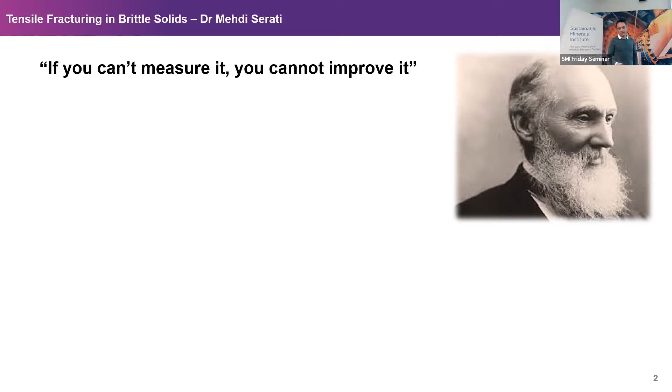But over the years, we have developed advanced testing methods both in the lab and in the field, and also advanced numerical simulation and probabilistic models. So the judgment we use in our design is more informed based on all this new technology becoming available to us. So measurement is the key.

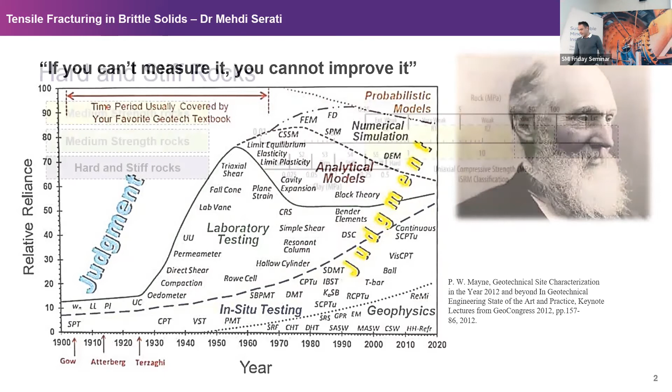And when it comes to measuring properties of rock, especially hard and stiff rock, measurement of tensile strength is a very controversial topic. But why is that? What is so unique about tensile strength measurements of rock, and why does rock behave so differently, in my opinion, when hard and stiff rocks are subjected to either direct or indirect tensile stresses? In order to answer the question, let's start with some basics.

According to the International Society of Rock Mechanics, referring to the chart on the upper right corner of the screen, the key property that distinguishes a hard rock from weak soil is basically an unconfined compressive strength of 100 MPa and above - that's the pink zone on the far right end of the spectrum. Between 25 to 100 MPa, if the unconfined compressive strength, or UCS, is within this range, it's classified as a medium strength rock. And anything below, generally speaking, is not classified in many literature as rock.

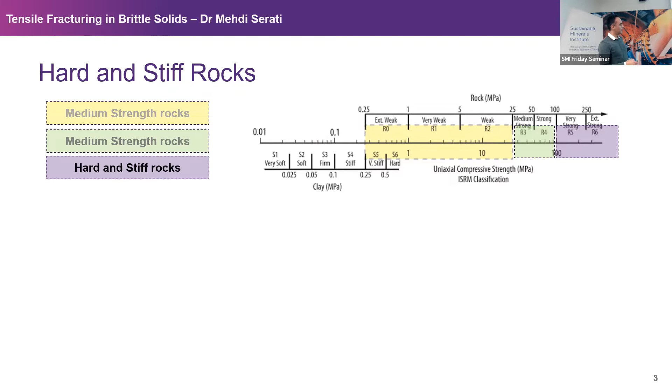Basically, we have a shared zone between extremely weak, highly fractured rock and very stiff soil. Hard and stiff rocks, like some listed on this table, also have a very low tensile strength relative to the compressive strength.

They have a high stiffness or Young's modulus, which means a high brittleness index, defined as the ratio of compressive to tensile strength. In some cases this could reach up to 50, the ratio of UCS to sigma t. And there's the energy you need to apply to deform the rock.

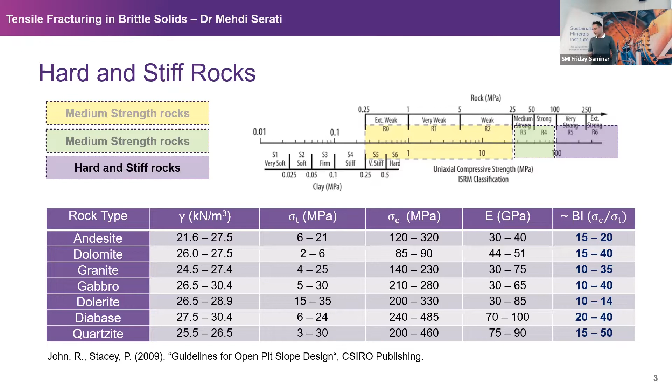If you put all these together, and especially if the rock is subject to loading, it means that when tensile rupture happens, it's going to be sudden, quick, noisy, catastrophic, and very spontaneous. And I've got a few examples for you in the coming slide.

All right, so this was a typical example of a type of explosion, like hard rock explosion, that you might have seen in the lab.

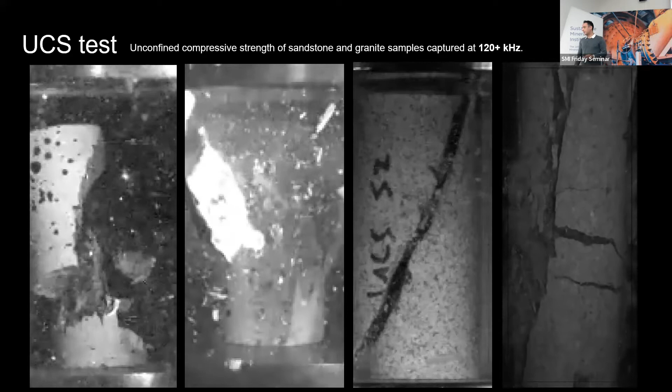All these photos that you see on the screen are at zero confinement, and they are captured at around 100,000 to 200,000 frames per second. With sandstone, the crack forms through an oblique shear plane. But when it comes to hard and brittle, stiff rock like the one on the clip to the left, it's very sudden, more like an explosion. It's totally different from the behavior of a relatively less stiff and less strong sandstone rock.

This is another example of rock burst or spalling, a type of hard rock explosion. This is not a blasting exercise. It's mainly a deep tunnel in hard rock due to higher stresses. You can install a seismic monitoring system, and the operator recognizes that something is happening and an event is occurring. This is what's commonly referred to as rock burst and spalling in the field.

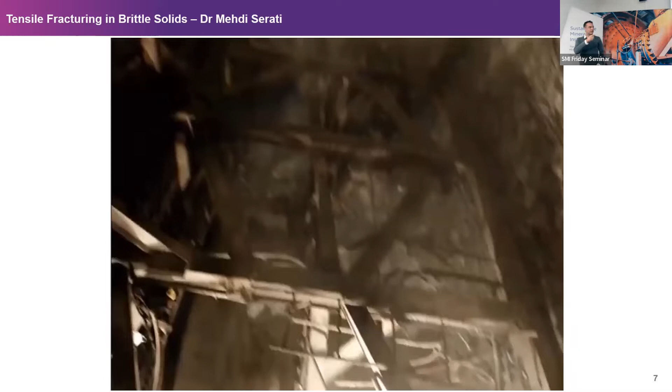This is another example of this type of dynamic behavior. A big block of rock due to spalling was separated from the edge of the excavation and hit the support system.

This one is interesting. It happens so quickly, as you can see - again, rock burst and spalling - that the poor operator has no chance to escape the excavation area.

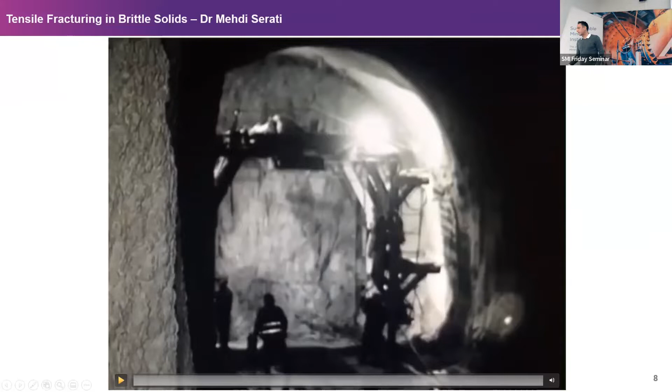What you see on the screen is our attempt to measure or understand spalling at the lab scale. So what we did: we have a block of rock, a cubic shape, in this case with different sizes, from 100 to 200 millimeters. There is a hole at the center, which represents the tunnel.

As you can see, when you apply loading under no confinement - a UCS, one principal stress in the vertical direction - the beauty is here at the roof of the tunnel, of the borehole. When you apply load, you get this tensile crack, the initiation and propagation of the tensile crack.

Then at the side wall, under this stress condition, you have the major tangential stress in compression. We see the type of explosion and the fragments separated from the sidewall flying into the excavated area. It's very similar to the type of spalling or rock burst that we see in underground excavation.

These were recorded - because it happens so quickly, we need to use a high-speed camera. So we use an ultra high-speed camera that can run up to 1 million frames per second. This is what you see: the frequency of the camera.

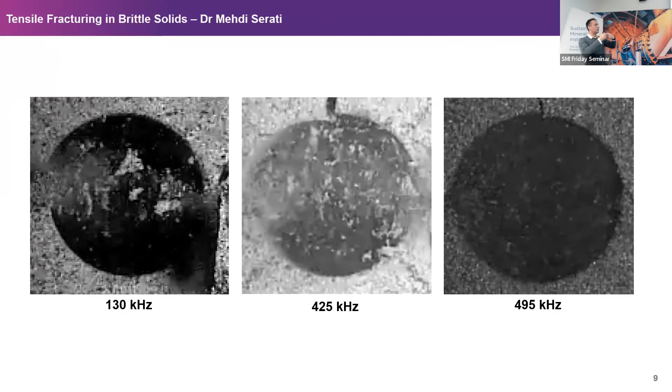What we did, under different hole diameters and different biaxial loading ratios, we tried to understand the spalling speed. You have the size of the fragment that you can collect after the test, and using the calibrated high-speed camera, you can measure the speed, which gives you the kinetic energy. So when spalling happens, as a function of hole diameter and the ratio, what would be the energy release during spalling?

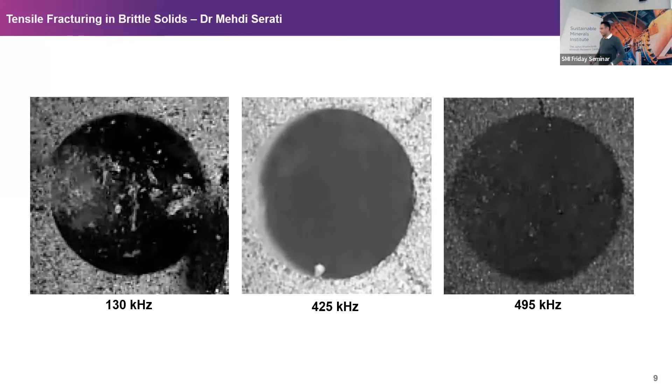Initiation and propagation of unwanted tensile cracks is deemed to be responsible for spalling and rock burst, but that's not all. There are many other applications in rock mechanics where tensile fracturing in brittle solids is also a very important and dominant rupture mechanism.

For instance, in hydraulic fracturing, this is an obvious case. We know, according to Kirsch's equation, in a deep mine, when the ratio of horizontal to vertical stress is less than 30%, or one-third, then we get a tensile zone at the roof. This is very similar to the example I showed you in the previous slide. More recently, Kaiser and colleagues have also suggested that spalling and brittle fracture in rock could also happen in weaker rock, like a slightly cemented sandstone or clay shales.

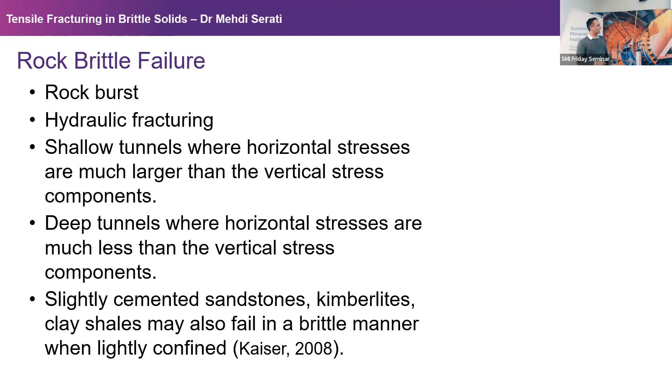The image on the screen gives you an idea of how extreme a spalling incident could be. Imagine working in this environment, with slabs or flakes that could be very large, up to maybe 1 meter, with sharp edges. The speed varies depending on the stress condition, but in our experiment could go

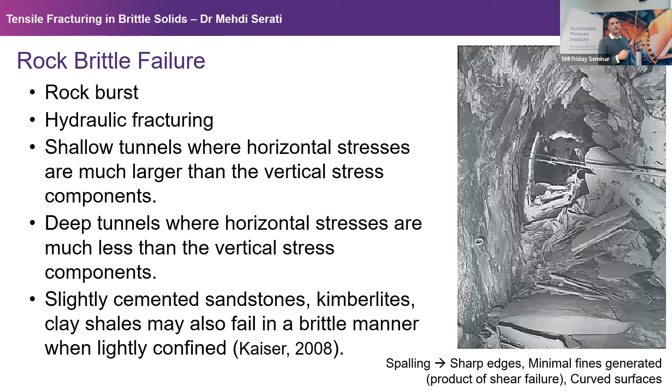all the way to 100 meters per second. With sharp edges, usually there is no fine or dust generated, because fine or dust are mainly attributed to shear fracture. This is totally different. It's a safety hazard, and if it's not controlled, it's going to be catastrophic and fatal.

In a nutshell, tensile fracture in hard and brittle rock, if not understood properly, could be spontaneous and catastrophic, could be violent and fatal, and most of the time it leads to a large fragment with huge energy release.

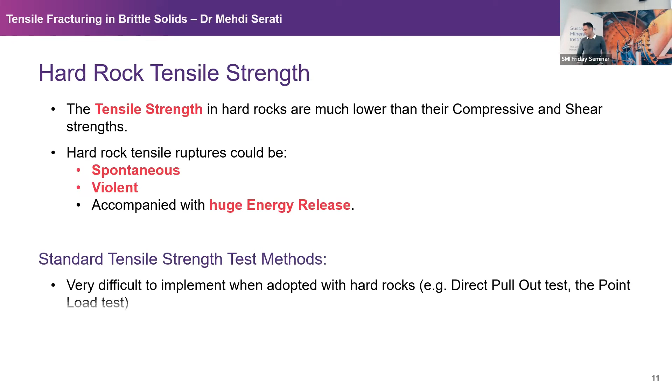So the question is, we need to find ways to measure tensile strength with ease and with reliable methods. You might argue that we do have standard recommendations to do that, right? But the problem is many of these standard recommendations were developed when mines were not this deep, the depth that we are now excavating minerals.

And as you go deep, you are confronting harder geological formations. Most of these old testing methods, maybe 50, 60 years old, to measure tensile strength of rock are very good when you are dealing with medium strength rock. But when you apply them to hard rock, it is very difficult to follow the standard requirements entirely.

I'll give you some examples in the coming slide. Most of the time, when these methods are adopted with hard and stiff rock, they tend to overestimate the tensile strength. And this is unfortunately a point that is largely ignored.

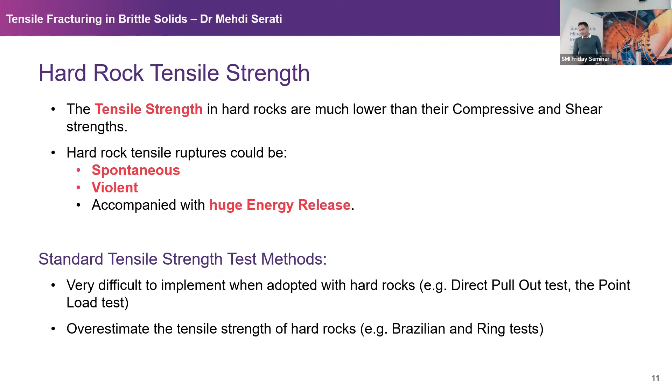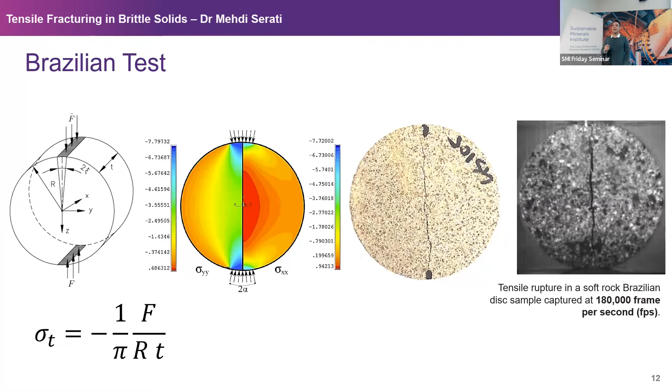In a recent project, we tried to understand what happens if you get different fracture patterns, different types of tensile fracture mode, and how that impacts our estimation of the tensile strength.

So we prepared, over a 4 or 5 year project, around 450, I guess near 500, Brazilian samples from a wide range of different materials. Here in this chart you see the distribution of the Brazilian tensile strengths. We tested ceramic with up to around 30 MPa of tensile strength, all the way to asphalt, which has only maybe less than 2 MPa of tensile strength.

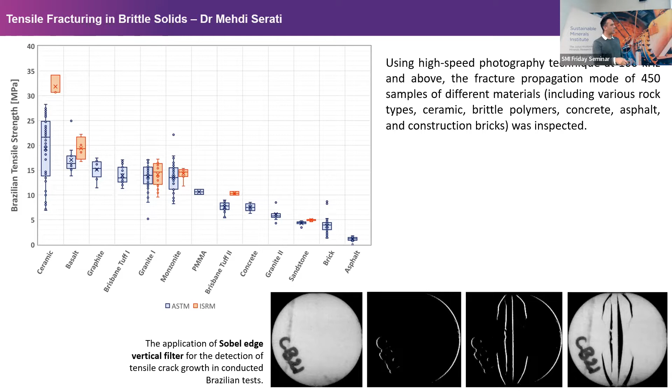In some cases, when we look at the high-speed recording, we needed to use specific filters and techniques to be able to record the initiation and propagation of the crack. And I think here is the fun and interesting part.

When you test the Brazilian sample of a material, depending on its brittleness index, you don't get just one fracture pattern - you get 8 different types of fracture pattern.

Type 1 and 2 are very similar, and this is what you expect from a standard Brazilian test - you get a single tensile crack that splits the sample into 2 halves, initiating from the center. Type 3 is when you have some moderate size shear fracture or conical shaped fracture at the contact area once the tensile crack is fully propagated.

Type 4, which is very violent, is when you have multiple cracking. Then we have type 5 and 6, when the crack doesn't start from the center, but rather starts in a straight, concave, or convex shape from one of the two contact areas.

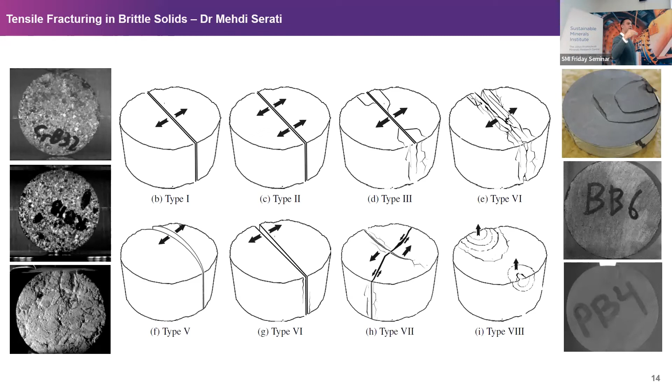The same applies for type 4. In some cases, type 4 is multiple cracking. So if you test your ceramic sample and don't get a single crack but still use the Brazilian equation, you should expect up to 50% overestimation of the tensile strength. And that's huge, that's huge.

So if you are using the Brazilian test to measure tensile strength of hard and stiff rock, and getting a single crack is very difficult, you need to treat it with caution. I'm not trying to say it's invalid - we did it in one of our journal papers and it was rejected because reviewers said you need to be careful, people are doing this. So you need to treat it with extreme caution.

Now what could be responsible? For instance, we are getting 8 different fracture patterns. What's causing it? Is it because of the boundary condition? Is it because of, for instance, the grain size? What could be responsible for those types of fracture patterns?

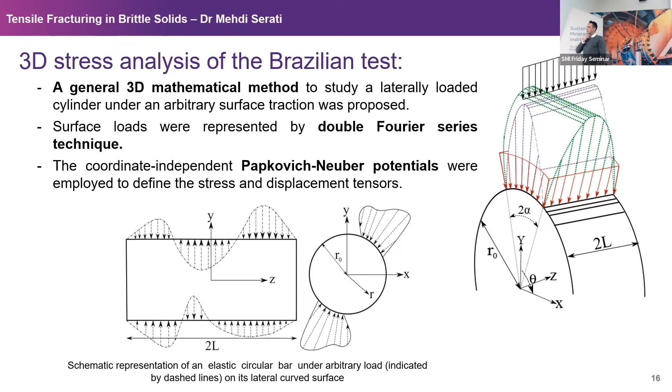In order to understand that, we developed a three-dimensional mathematical framework. We used a double Fourier series technique when we implemented the Papkovich-Neuber coordinate independent potential. My apologies for this slide - I have no intention to go through all these equations, but the reason I put it up is just to demonstrate the approach.

This 3D framework, as long as we can introduce the boundary condition at contact using a double Fourier series, can be used to generate and get an idea about the induced stress inside the solid body. For instance, here we have the double Fourier series representation of a typical case where the load on contact is distributed uniformly, not only on the periphery but also along the thickness, or different types of loading conditions.

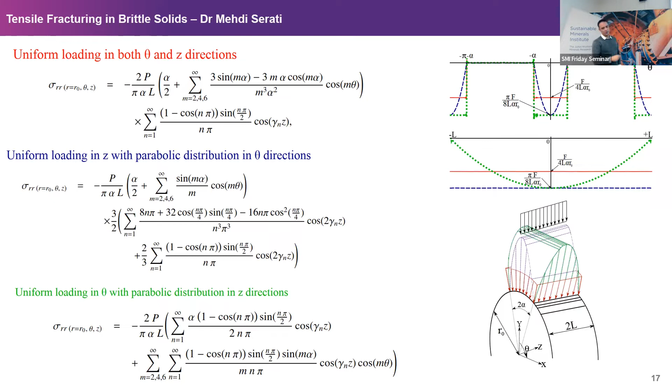And I think this is the interesting part. In a standard Brazilian test, it is assumed the contact angle is small, less than 15 degrees. The load is distributed evenly on the contact arc length and also along the thickness. If you use that testing or boundary condition and put it inside the three-dimensional framework, this red solid line is the type of stress distribution you get when moving from A to B. So this is a tensile positive regime.

This means that the maximum induced stress, normalized based on the Brazilian equation, suggests that the maximum tensile stress, sigma XX, happens at the center. It's almost uniform all the way to 80% of the radius. That's why you get the Brazilian tensile rupture under a standard loading condition.

What happens if the distribution of the load along the thickness of the sample is not uniform? What would happen if there is a violation of that - for instance, during the coring process, or if there is a grain with different stiffness? What happens if you cannot safely assume that it's uniformly distributed along the thickness?

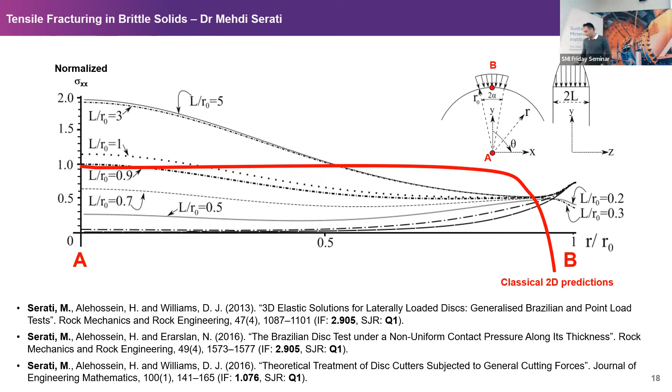Now here you see also some other examples of granite and basalt. Try as hard as you want, there's no way you can get a single crack, and we already know if that's not the case, you tend to overestimate. So what else can we do?

In an attempt with our colleague at UNSW, Hossein Masoumi, you may know him, we proposed that you can cut the Brazilian test in half, and by carefully controlling the contact angle at this point, you can get rid of all these unwanted multiple cracking and shear rupture, and generate a single beautiful tensile crack.

Here you see also the numerical prediction that suggests that the midpoint experiences the highest induced tensile stress. It suggests that if you can't fully comply with the standard recommendation for Brazilian tests because of the nature of the rock you're dealing with, another alternative might be to cut it in half and load it up this way. Of course you need to measure the geometry, you need this contact angle.

We prepare some specific spacer, you put it into that equation, and it gives you an estimation of what would have been the induced tensile stress responsible for this tensile crack.

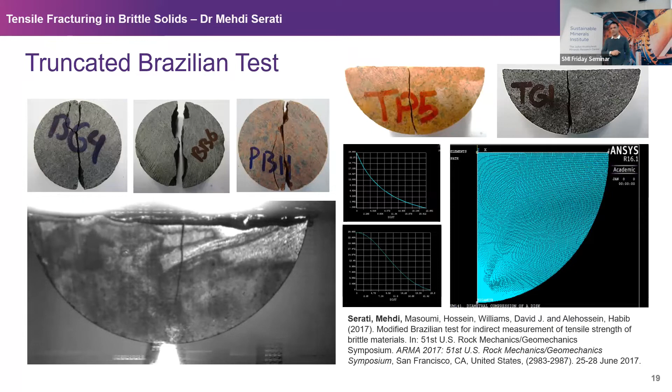We also try to challenge our 3D theoretical framework to understand the point load test. You don't need me to tell you, your expert knows better than me, that the point load test is an index test. One way to do it: you have a cylindrical sample, you apply concentrated load using these conical contact points, and generally you get an estimate for UCS, but we also have an empirical equation that lets you get an estimate for tensile strength.

Using the theoretical framework, we propose this expression. It's purely mathematical, not experimental. In this chart, the prediction of this equation is plotted with the dashed line, one for Poisson ratio of 0, to get the spectrum, and one for Poisson ratio of 0.5.

The dot points here are experimental results. Hopefully you agree, given that it's an index test and you just need an estimation, there's no way you can do a point load test and get a very precise measurement of tensile strength. Hopefully you agree there's a reasonable agreement between the prediction of this equation and the experimental results. By the way, the ISRM standard suggests that if you're doing a point load test this way in a diametrical loading condition, the length of the sample needs to always be larger than the diameter.

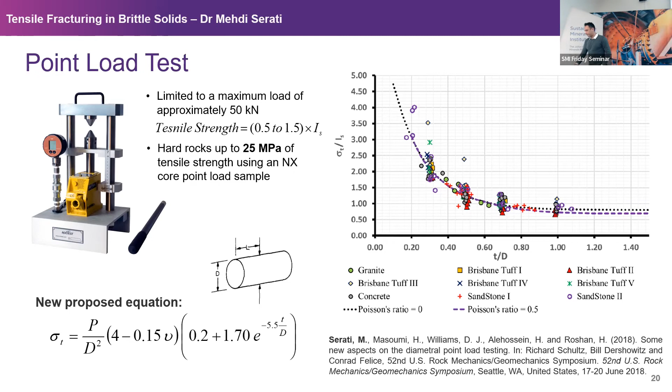The ring test again. Those who have been using the ring test know that if you apply a load on a Brazilian disc with a hole at the center, you get a tensile crack from point M, which is the point with maximum tensile stress, to N.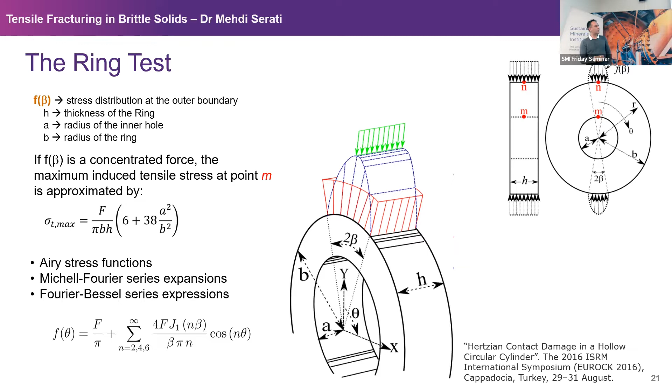But if you have done the ring test, and I'm sure you are expert, you might have noticed that in some cases, depending on the ratio of the hole to the diameter of the disc, not only do you get this tensile crack, but also sometimes a tensile crack in this other direction.

We didn't know what was contributing, but using this theoretical framework, we could prove mathematically that if the ratio of the hole to the diameter of the sample is beyond a critical point, there are always 4 points inside the diameter that reach the tensile strength of the material. Therefore you get 4 tensile cracks, not 2. If you're interested, we explained it in this now almost 6 year old conference paper.

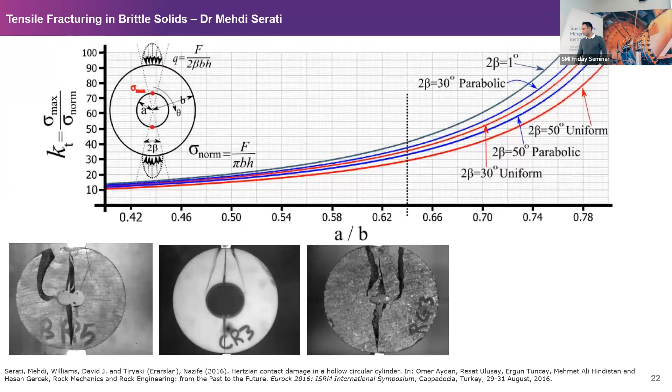All right, my last experience that I've prepared for you: brittle failure of rock is quite challenging and problematic, and getting the tensile strength of hard rock is not easy based on what I demonstrated. But it's not only for rock, ceramic or hard rock, it's also with other super brittle materials like tungsten carbide and diamond. When working at CSIRO on my PhD, I was fortunate to be involved in a so-called thermally stable diamond composite, or smart cut technology.

Basically, what this does is cut hard rock, which has a UCS of more than 150, 200 MPa, where there's no way you can use mechanical cutting. You need to go drilling and blasting instead. But CSIRO patented the technology, TSDC. If you Google it, you can find a lot of information on using these type of cutting elements to cut extremely hard rock.

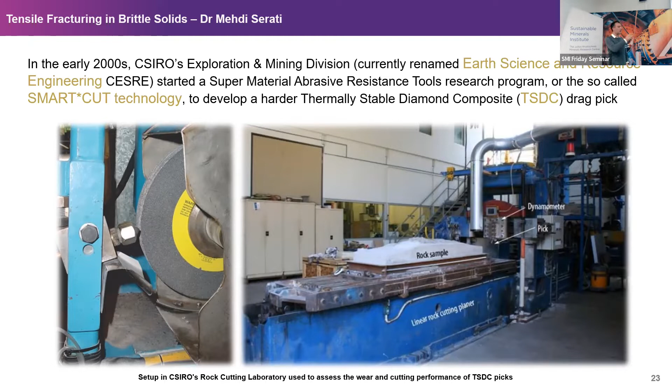And this is a type of setup that was available at the time. You see, for instance, we have a single cutter, a single groove. So we have a very strong rock, say 200 MPa, and you have the cutter here, and you move it and scratch the surface, and then observe the force and the development of wear on the cutting element.

Very interesting result, it was not generated by me, but I had access to it. So what you see on the left is the development of wear flat on a typical tungsten carbide when it was used for a line cut of a very strong rock, around 200 MPa. Only after 1.3 kilometers of test you can see the tip - it's obvious the WC tungsten carbide cutting element is completely blunt and needs to be replaced, because of the huge thermal temperature generated at the tip of the cutting element.

But look at the TSDC cutting element. Although this cutting bit has been used for 4.2 kilometers of cutting, almost 4 times the previous experiment, you see the head or tip is barely touched. So it has a very superb wear resistance, very promising.

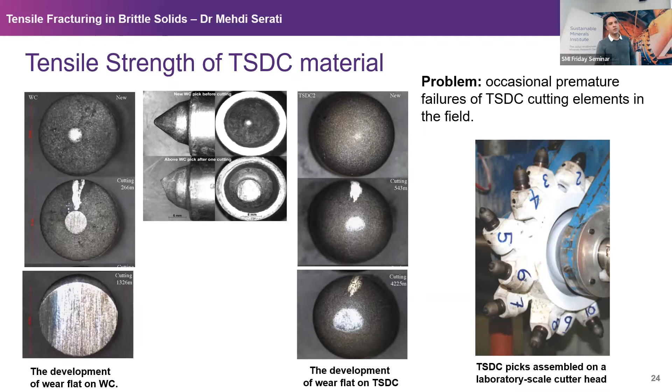The problem, though, and that's when I got involved in this project, is that you test the rock cutting with this new technology, beautiful, everything is a tick. But then when you go to the field, those TSDC cutting bits suffer from premature tensile failure. Why? And that's when I got involved.

I proposed that one potential reason is that we are measuring the tensile strength incorrectly, because we are using the Brazilian test, and there has been a debate. So I proposed that the value of tensile strength we get is potentially incorrect. We need to find an alternative method to get it right, and then redesign based on the new tensile strength.

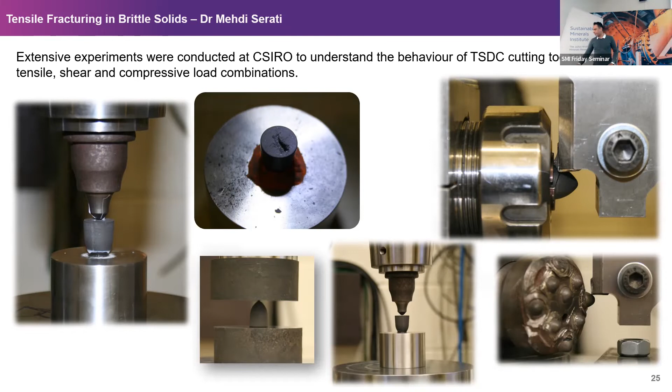So again, I'm showing these results, but it doesn't mean I was involved directly in all of them, I had access. So we tested this type of TSDC cutting bits, which at the time were mainly available in bullet shape, under different variations of load combination - compression, shear, tension. And then magic happens: if you have a bullet test and measure the contact force, you can get the tensile crack, very similar to the Brazilian test, but with a different geometry.

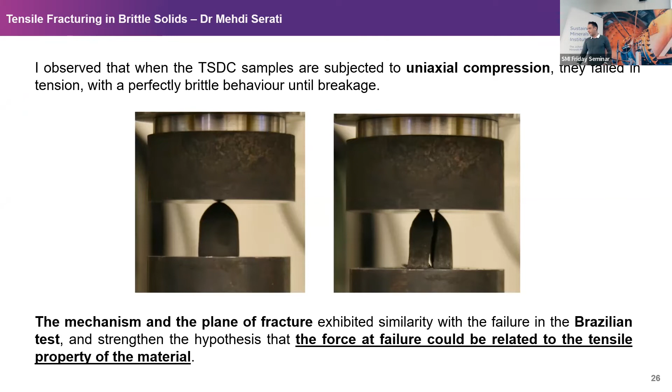So the question is, if you have the geometry and the load at failure, can you calculate the tensile stress induced inside your sample responsible for the tensile fracture? I could not find anything in the literature for that type of loading condition, and the sample profile could give us an equation for that induced tensile stress.

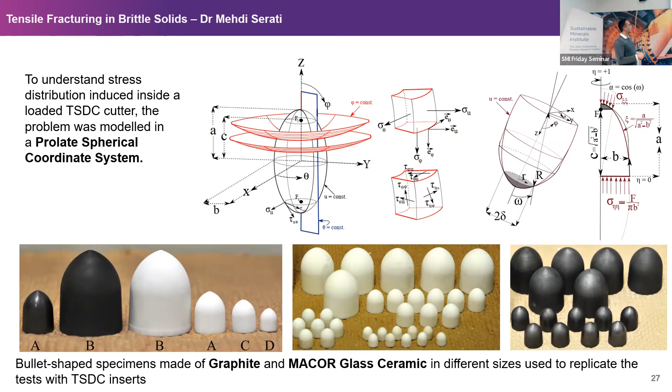So what we did was replicate the test with different types of material, ceramic and very brittle graphite, at different sizes, and I had to introduce the boundary condition in a prolate spherical coordinate system.

Guess what? Again, it was what I proposed, and the fantastic team that I've been working with. We used this method, and we realized that yes, the tensile strength that you get for diamond composite was overestimated. So we redesigned it, and our group redesigned it, and then it survived tensile rupture, but then it suffered from shear failure because of changing the geometry. And it was towards the end of my PhD. I really wanted to get involved and improve it further, but I kind of disconnected.

So basically, we proved that yet another method to measure the tensile strength is by loading a bullet-shaped sample, which might seem odd because it's very difficult to prepare a rock this shape. It's not designed for this specific rock test, but rather for a very strong type of material like diamond, which was what we were dealing with during this smart cut project.

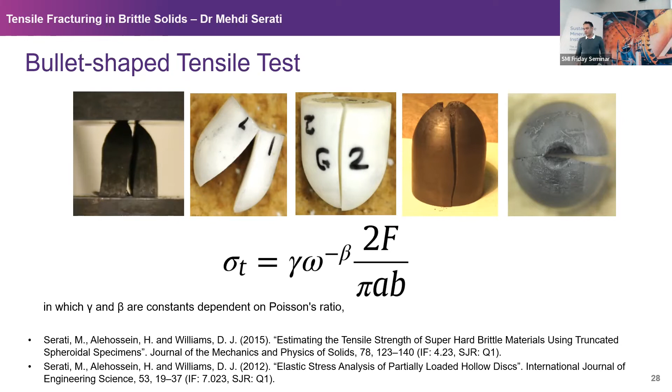So there has been quite a lot of advancement, where you need to look at an S-shaped failure envelope, and there have been a lot of beautiful papers on a trilinear type of envelope. However, even if you look at these new papers, they largely ignore the importance of intermediate principal stress during a spalling event. So we put forward a discovery project proposal with the same motivation, to understand spalling, especially in deep tunnels, where the available methods are inadequate, mainly because of the exclusion of sigma 2 and temperature. And this is something that is happening.

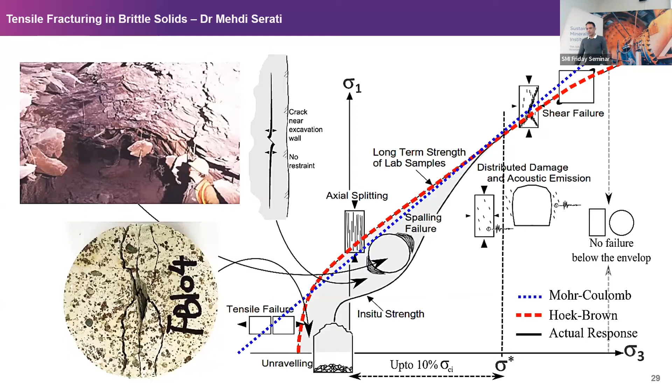So it was successful. We are one year into the project. COVID has kind of delayed the progress, but hopefully we will learn more about this idea, and if the opportunity arises, I might be able to share some of the results with you another time.

We can also perform hydraulic fracturing, measure permeability, and measure the behavior of rock at elevated temperature. Basically, if you have a material and you're interested in developing a coupled thermo-hydro-mechanical constitutive model, I think this type of device is going to help you a lot.

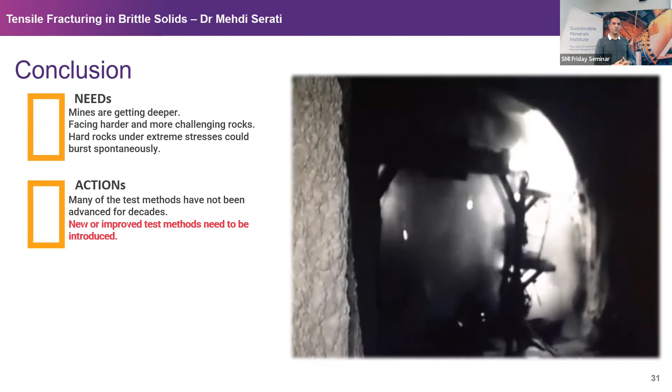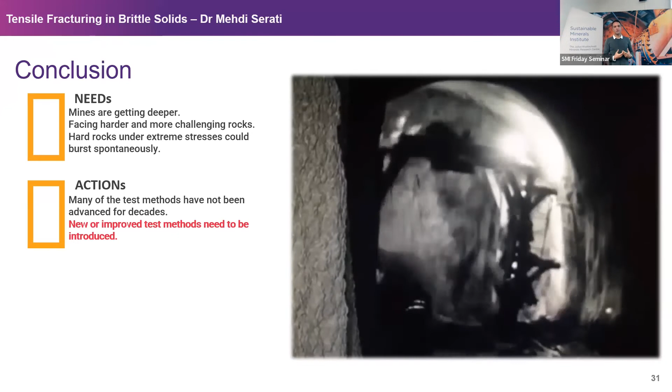We know that to understand and avoid this, and to provide a better design for this harsh environment, the available models like Hoek-Brown or Mohr-Coulomb are inadequate. We need to develop new models and new methods. Some of the existing ones are quite old, 60 or 70 years old. What I tried to present in this talk were some of the attempts we have made to address the issue, but it's a work in progress. We are learning, and hopefully if given another opportunity and we learn more in the future, I hope to share it with you again.

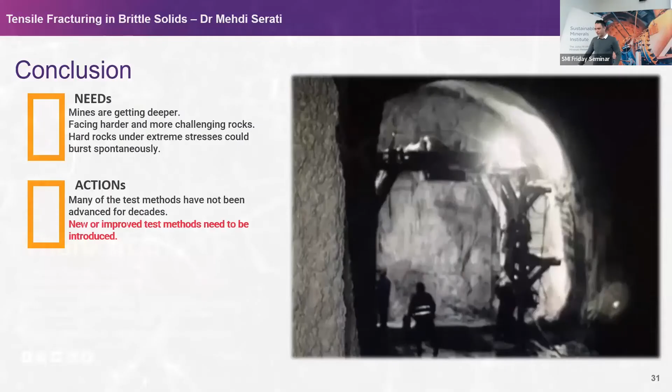Yes, the thermally induced spalling - I didn't show it to you, but we are working with our fire group and they have made quite an advancement in this area. I'm fortunate to be working on two PhD projects together, one as principal, one as co-advisor. So inside the cell, you can go all the way to 200 mil.

Imagine you have a 200 mil cube, which is quite decent really. Then you drill a hole, and this hole could be across the thickness, or you may close the end, so it more generates the type of tunneling environment. We have recently ordered, and are in the calibration process, a heating rod that can generate up to 1000 degrees.

You apply stresses in 5 directions because one end is free, and then depending on the stress regime you're interested in, you heat it up - the heating element up to 1000 degrees - you insert into the hole and create a heat shock to see how it generates spalling or failure. Or you can put it inside, heat it up, and in 15 minutes it reaches 1000 degrees. So there are different ways you can do it.

This is a project we have been working on, but early results suggest that if there is a fire in a tunnel, it becomes quite highlighted in the spalling of the shotcrete and concrete element - it's not about the rock. The rock itself, especially if hard rock, is fine if you don't go beyond the crack initiation stress level, which is the onset of dilation. There is a paper published by one of our students on this temperature topic.

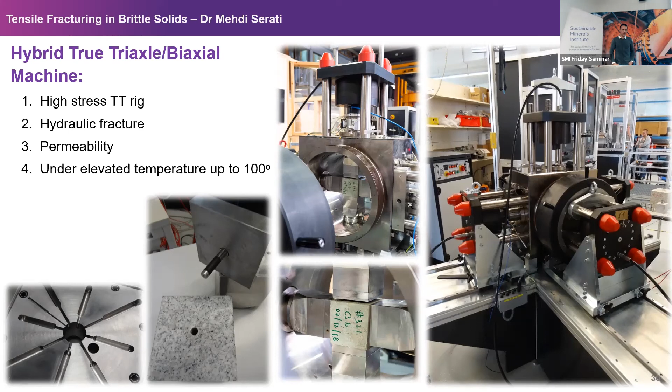Probably not a good time at 10:01 to ask another question. I know Andre already asked it, and a couple of people brought up the heterogeneity thing, but it was notable to me that all the underground examples you showed were in extremely heterogeneous rocks with strong anisotropies. I understand why you're starting with isotropic, high tensile strength rocks, but it's turned out to be very complicated. I'm wondering how possible it will be to ever develop the same sort of framework of knowledge for the majority of rocks that are extremely anisotropic.

Well, I'm not quite sure I'd be able to give a clever answer to that, but to me, you need all that information for design. Like for instance, crack initiation, which is a concept developed by Professor Derek Martin and Erik Eberhardt from University of Alberta and British Columbia over many years - they have 20-25 years of research in that area. Peter Kaiser is leading that, so it's 20-25 years.

Spalling is complex, alright? You cannot measure UCS or tensile strength and say this is related to spalling, but the onset of volumetric change, or onset of dilation, or crack initiation is the bare minimum. You need to make sure the induced stress is always below that. Now, that might in some cases overestimate, but it's like that. If you want to add anisotropy, temperature, whatever, it just makes the problem more complex. But this is the bare minimum - you need to make sure you don't go beyond it.